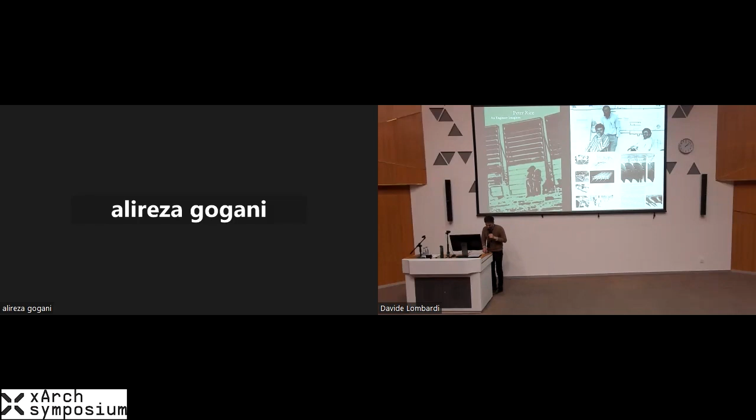And why I start my presentation like this, because this is quite special for me. When I first came to China in 2011, 2012, so about 12 years ago, I came here for an internship to do my final master degree internship, 6 months I had to do to get my engineer diploma. And I did it in RFR, Shanghai. Peter Rice founded his own small studio in Paris in 1982, where they were specialized in special structures and complex facades. And they had opened a branch in Shanghai, in Asia. And I did my internship in RFR, Shanghai.

And at that time, I had the opportunity to work as a graduate engineer on some very interesting projects, a wide variety of projects, from all the scales that you can imagine, smaller projects to bigger projects. But especially, I had the chance to work with great people. And I learned literally everything that I know today. So I came for a 6-month internship, and I stayed in RFR for 8 years.

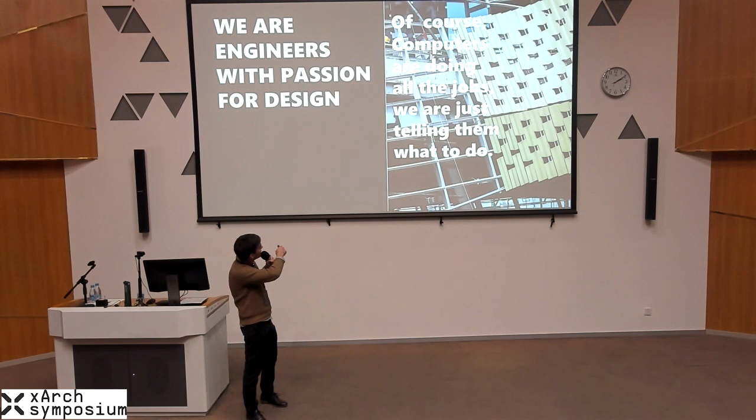So a few years later, end of 2019, right before COVID, I decided to try and start my own small studio. And my studio is called Bespoke. So we are engineers with passion for design. By the way, those are the first page and the last page of my studio brochure. I've been asked not to sell my studio too much today, so I just put the first and the last page.

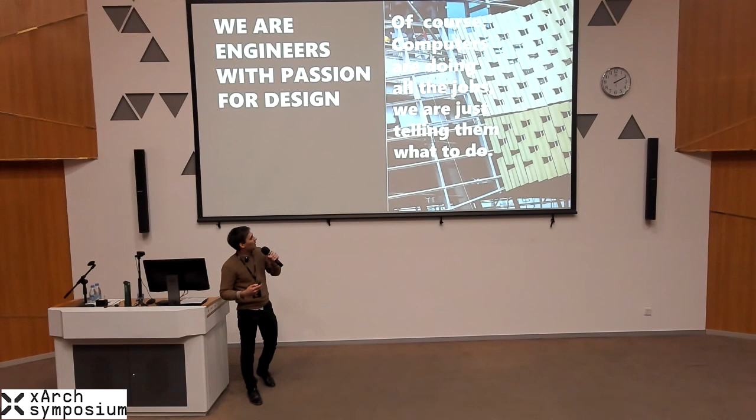And on the last page, it's written this: of course, computers are doing all the jobs. We are just telling them what to do. I'm sure that you get the ironic sense of this sentence, right? Because it's not just about giving some orders or requests to a computer and getting what we need as an engineer. It's more about developing processes and solutions to make our orders and requests clear enough so that the computers and the digital tools can give us what we want and what we need.

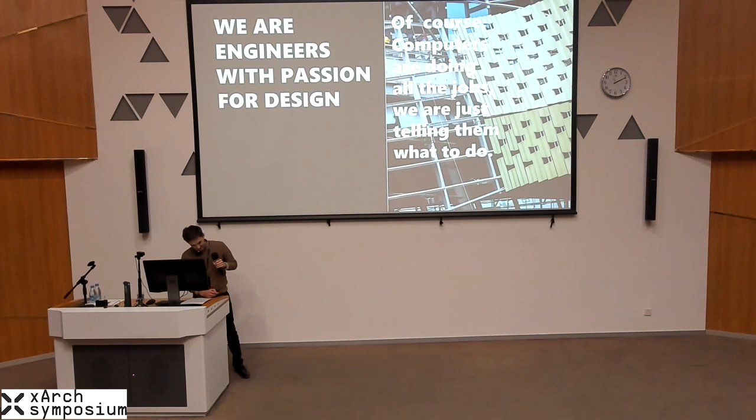And I'm not saying that this does not happen to us anymore. Okay, it's true, we are still sometimes not taking the best decisions when we think about solutions for projects, and that can lead to, not in that extreme way, but lead to something that we are not fully in control of.

It's also because we are too often lazy to organize our thoughts first before jumping into digital tools. Because it takes a lot of energy to clearly think and organize our own thoughts before linking the wires together and putting many components on Grasshopper like this.

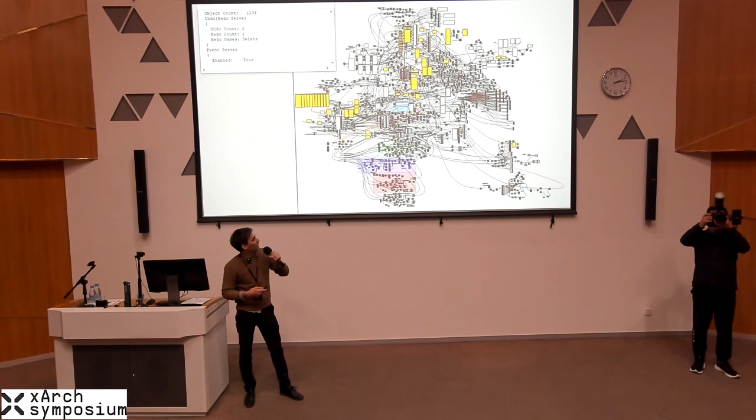You know, I receive this kind of Grasshopper quite often, whether it is from colleagues or other people working on projects with us. And when I receive this kind of Grasshopper, basically we have two choices. Either we spend hours or days to dig into it and try to understand someone else's logic, try to modify some inputs and see that actually you don't get the output that you want, because the data management or the way it's sorted has not been thought through in a clear way, or at least in the way that I need for myself.

And the other solution is to spend days and hours to understand the real problems behind the real questions that we have to solve. So first of all, understand the real questions, make it clear in your mind, and then jump to Grasshopper and apply what you have already clearly defined in your mind as logics, as solutions, into digital tools. So I let you guess which option I prefer.

So today I would like to share with you two or three concepts that we try to apply as much as possible when we develop solutions for projects, and that help us to stay in control of our process. So the first one is about abstraction.

A model, by definition, is an abstraction of reality. Building a model means reducing the infinite complexity of the real world to a level that can be described with manageable effort. And today, with all the extremely powerful computers and almost unlimited storage space that we have access to, it is very easy to add more and more information into our models, because we think that more information is better.

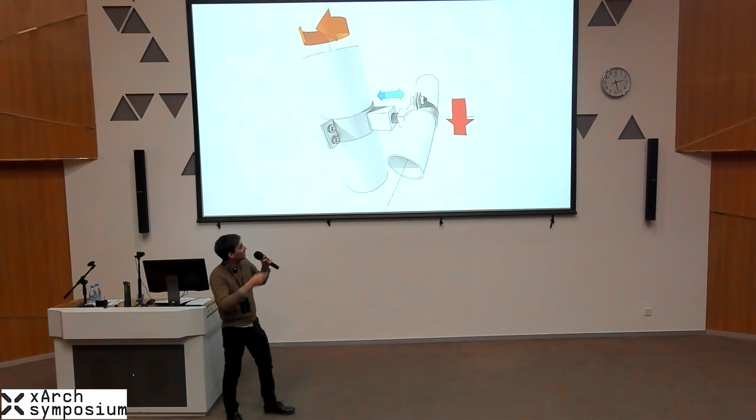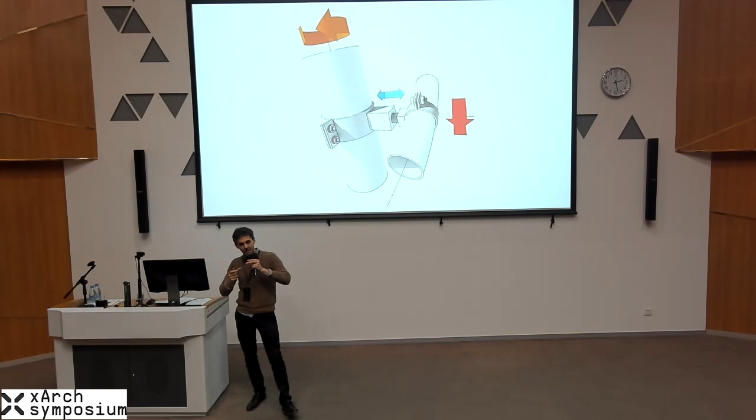And between 2 curves in space, there's a rule that says you can always find a line or a segment that is always perpendicular to those two curves. And so because of this kind of optimization, we were able to design a connection detail that can self-adjust its position on the profile, that can self-adjust all the rotation angles between the profiles. And also we added another adjustment layer. This one was necessary during the installation of those profiles.

And then we applied these details everywhere. So even though this surface was very curved, completely without rules, after optimization of the structure, after optimization of all the structural members, we were able to apply the same details everywhere, which helps a lot during the installation, during the construction, during the fabrication, for the budget as well, of course. And by the way, we applied the same kind of logic a few years later on this MAD project in Xiamen. Same kind of thinking, same kind of logic.

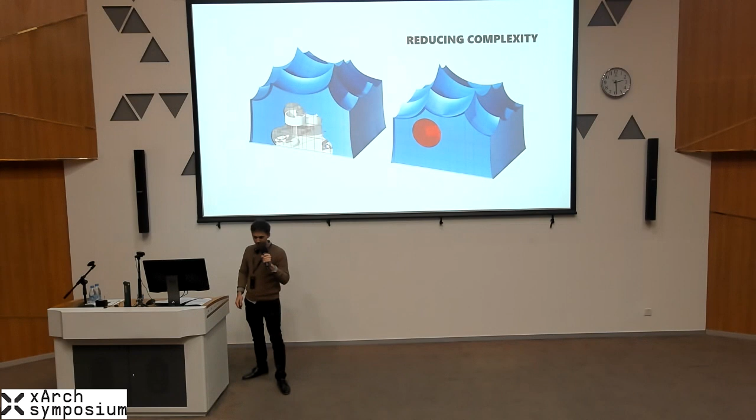The second point I would like to show you that is very important for us when we start to work on projects is what I call reduction, and more specifically, reducing the complexity. I'm not sure I am able to show this project, because this is a very recent project that has not been released yet. But anyway, this is a project in Shanghai. The architect Yu Ting from Wutopia came to us to help them to build. Basically, they had this scheme, this concept, and they came to us to help them get it built.

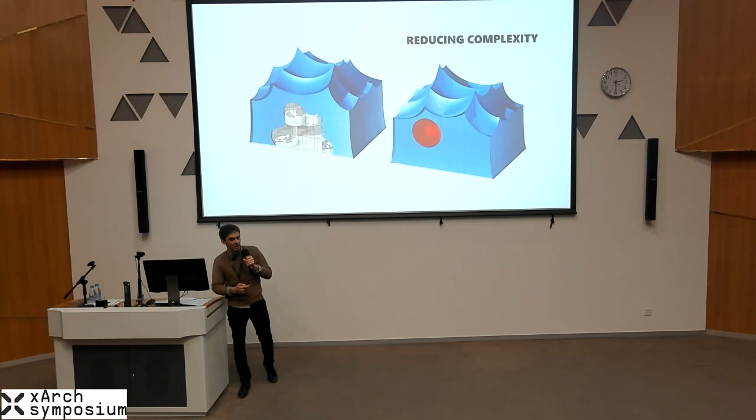So very curvy geometry, very highly double curved, and they had this intention to use very big, smooth panels, stainless steel panels. They wanted to use blue stainless steel panels. So you can imagine all this level of complexity when we start to think about fabrication and waterproofing and all these kinds of considerations.

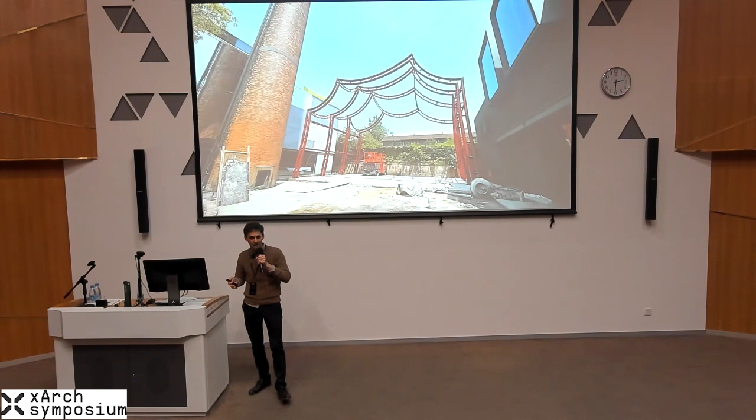And this is what was on site when we first came for our first meeting with client and architect. The main structure was already built by the client team itself. They have a small construction team and they already built it. Basically, they took the model from the architect. They said, well, it looks approximately like this, and they built it like this. All the curvature, all the connections were approximately looking the same as the reference surface. And so we came to the site. This was in July this year, and we had a kickoff meeting with client and architect together.

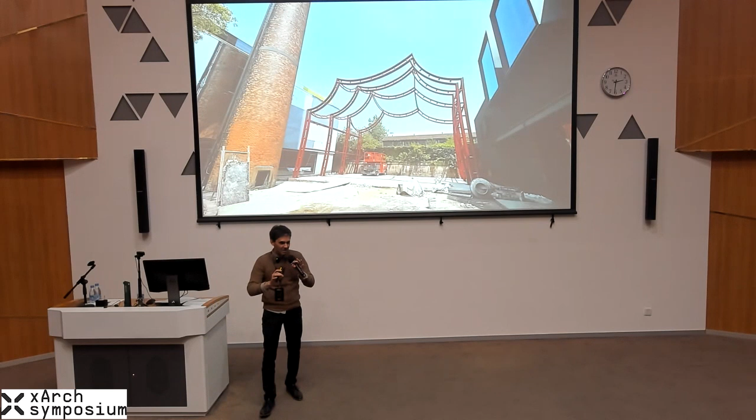And the architect presented us to the client like this. He said, okay, Mr. Client, here is Florian, our bespoke. And he can optimize, simplify any double curved geometry into single curved geometry without changing anything on the design. He literally said that to the client, really. So it was a bit funny to see how people see us and present us to others, you know.

And so first of all, when I hear that, because I hear that quite often actually, people come to us and say, okay, you can do your things, but give us a rationalized geometry or help us to build it within our budget. And the first thing I reply to them is that, of course, okay, we will think about it. We will put some energy on it, but we are not magicians. We are not doing magic, okay? So I asked them for a little bit of time to think about some potential solutions, what directions we want to take to get their project built.

And then we left, and I was almost out of the building, and the client told me, by the way, Flo, this has to be finished end of September. It's really true. So this was adding another challenge to the problem. So I took some time, not too much, to think about what kind of solutions we could apply to get their concept built. And here we actually proposed to them a radically different solution.

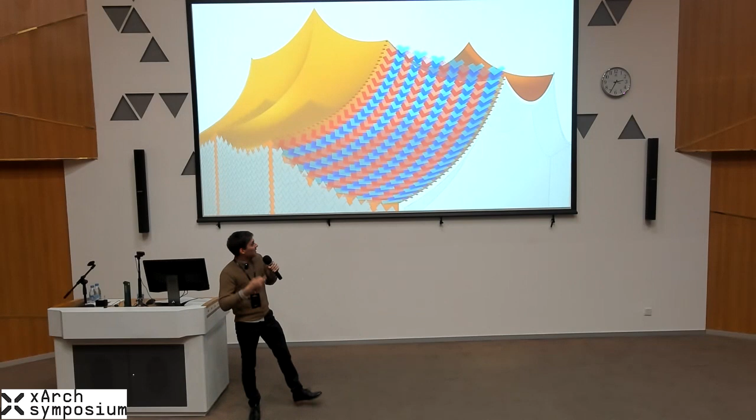And they quite liked this idea. They were happy because it was solving most of their constraints, because of time, because of fabrication, because of budgets. So with my colleagues, we started to dig into this solution. And when we were on the computers together, I was telling myself that, seeing their geometry, maybe on this project we will have about 6, 7, maybe 8 types of tiles to fit and panelize the whole geometry.

Finally, we only got one type. So we optimized all the grids so that the whole geometry can be panelized with only one type of unit. This is blue stainless steel, like they wanted, 0.9 or 1 millimeter thick, small panels with this kind of shape, which actually reminds of the W of Wutopia, from this architect. So they also liked it. And there's only one type. When receiving those, they still had this plastic cover on them, so you still need to remove that before you can install them.

And even though there is only one type of tile on the geometry, because it's a very curvy structure, a very curvy surface, all the grid is still distorted. All the space between the rows, if you want the overlapping of the tiles working everywhere, and if you want not to see the connections, then each tile needs to be slightly adjusted and slightly rotated in its plane so that you can get this with only one tile.

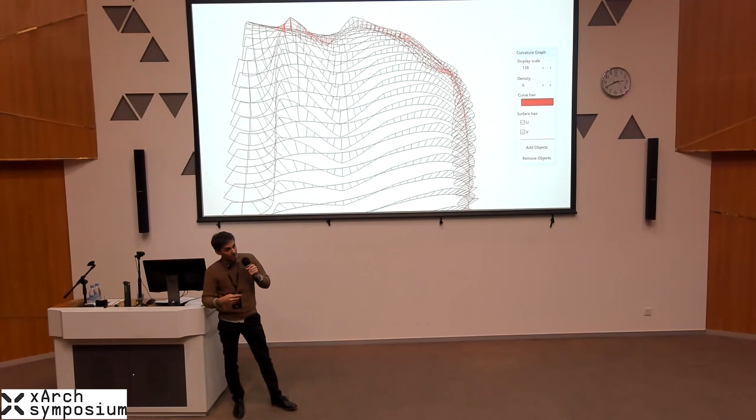Here, all the profiles, the curved profiles, were having a continuously changing curvature radius over the length. So I'm not saying that this is impossible to fabricate. There are very few factories in the world that can fabricate these kinds of profiles. So you have to find them. But most importantly, it's extremely difficult to fabricate these kinds of profiles, like spline profiles, bend these kinds of profiles with the tolerance that was required for this project.

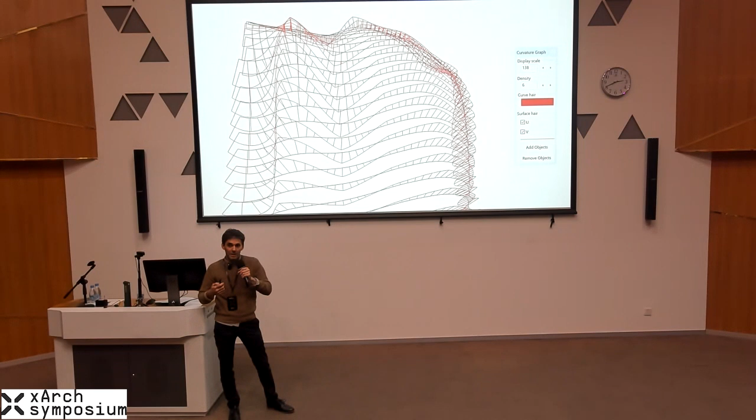So we started to think again on this problem, how to make it easier for fabrication. And then we started to develop some process so that every single profile was fitted or transformed as a series of tangent arcs. You could call it poly arcs, for example. And if you zoom here, actually, this was done in 2014, if I remember, yeah, 2014.

At that time, maybe I did not search enough, but I did not find a tool that was able to provide us exactly what we need. There were some tools, but it was not exactly what we needed. So I decided, okay, let's spend some time and try to develop it ourselves. Try to make it ourselves. Yeah, you see, I mean, this is a very small definition.

It's not complicated, but we did it ourselves, and this way we were able to tweak all the inputs that we wanted, all the parameters that we wanted to put in, and we were able to get the exact results that we needed. And for this, we fitted all the curves, all the profiles with those algorithms. And we set up a target deviation of 10 millimeters between the reference curve and the fitted polyarc curves.

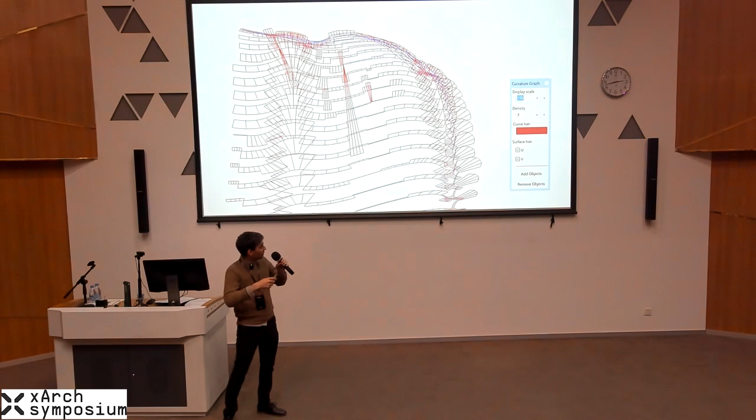This was the result after simplification. And then after this, the factory decided to give it a try. Before this, they were just telling us, no, we cannot do this, or we don't want to take the risk because we are not used to doing that. So we discussed with them, checked their production capacity, what they are able to do. And then after explaining to them how it was rationalized, they tried it.

They pre-assembled everything in the factory to validate the whole geometry. Then we did some mock-ups. Those tiles actually have LEDs within the glass lamination. These were pictures during the installation on site. And this is the final object, the final project.

And the last point, the last example I want to show you, is about this detail. So you remember this canopy in Shenzhen, right? Frankly speaking, I did spend quite a lot of time on this one. Because you have to imagine, this was, if I remember well, done in 2013 or 14, I guess. So at that time, T-Splines, I'm talking about Rhino, I'm a Rhino user, T-Splines in Rhino was almost out already. And at that time, the SubD that we got in Rhino 7 was not there yet.

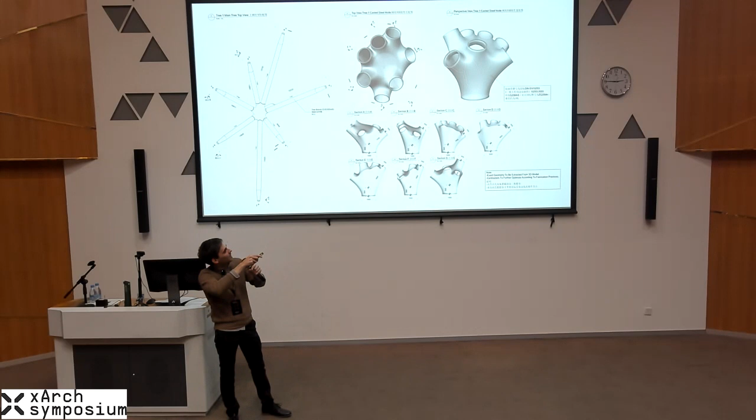But I had this idea of these tree columns, you know, and I wanted to build this detail. And I knew that with enough time, enough energy, you can get it right. When I say get it right, it's getting all those constraints right. Because as a structural engineer, you know, the force flow between the main trunk and those branches is very important. So you need to get all this tangency right, getting all the curvature between the profiles also right.

Constraining all those members to be a perfect circle, this was also a challenge. Even today, with constraining SubD edges, it's not easy. Even though there are some hidden commands in Rhino 8, but this is something else. And so we did it, same as the project before. We developed these kinds of tools to generate this shape.

And the thing is, what is great today is even with SubD in Rhino, even with all these kinds of new tools that are coming to us every day, I'm still using the definition I made in 2013 because it's working well. And if today we have to design a node with 20 branches, we can do it.

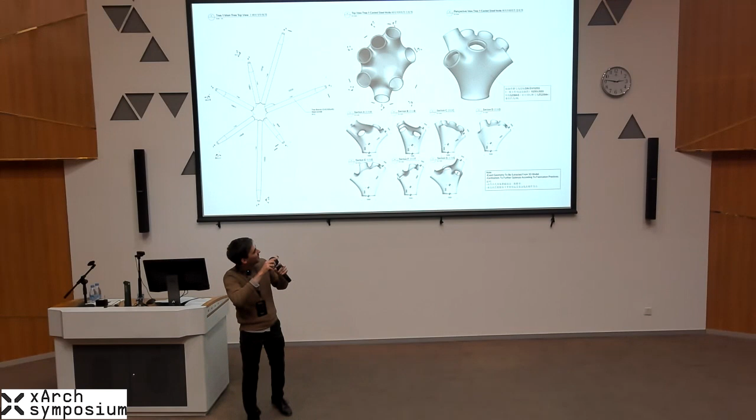And you know what is great as a young engineer is that you spend time on the models. You spend time to develop some solutions to real problems. And then a few months later, you get it built in factory. You see it. You go to factory and you discuss with workers. And yeah, this is what you saw a few months before on your screen. This is very rewarding.

So this is a cast steel piece. And the mold for this piece was done in sand. The whole piece weighs approximately a bit more than 5 tons.

So 3 points to finish and as a conclusion. For us as engineers, to keep control over all the processes that we are designing, we have to be the ones that are driving the tools and not the opposite. Today, I personally think that we are not using more than 10%, or even a lot less, actually, maybe more than 1% of all the tools' capabilities that we have today. And even less if we think about combining those tools together.

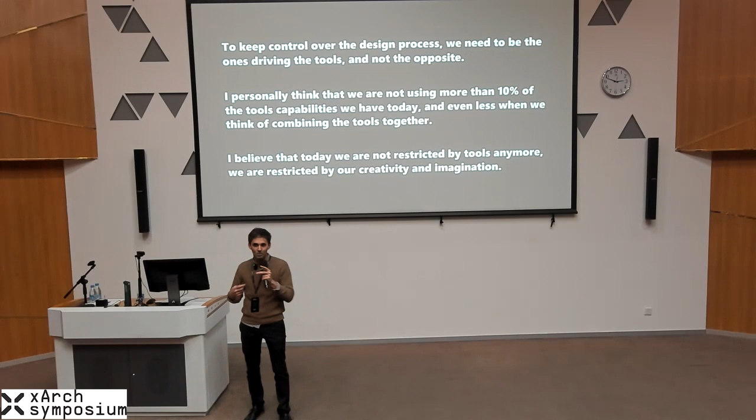As Arturo was saying this morning, it's like we have new tools every day. Things are going very fast, we don't have enough time to master things, and we have other tools coming. So it's a very strange period. And the last one is that I really believe that today we are not constrained by tools anymore, but we are more constrained by our creativity and imagination. And this is actually an echo to the first page of the presentation, because an engineer imagines. Thank you.

I think, okay, we can leave it as is. So as I announced before Florian started this presentation, we moved from, let me put it this way, the digital dreams from Arturo to the solid reality. And I'm sure the Italians will understand even more what I mean with solid reality, with a 5-ton steel node, after the Umberto Boccioni 4.0 in the futurism approach from Arturo. Is there any question from the audience? Oh yes, we have you.

Florian, how does the drainage work in the middle panel at the top center? The blue one, right? Yeah, I didn't see a picture. I'm sure there are areas of drain in the middle. No, we leave it as a pool. It's an accessible pool on the roof. Why fight water when you can use it for a pool, no? Yeah. No, of course, we thought about this.